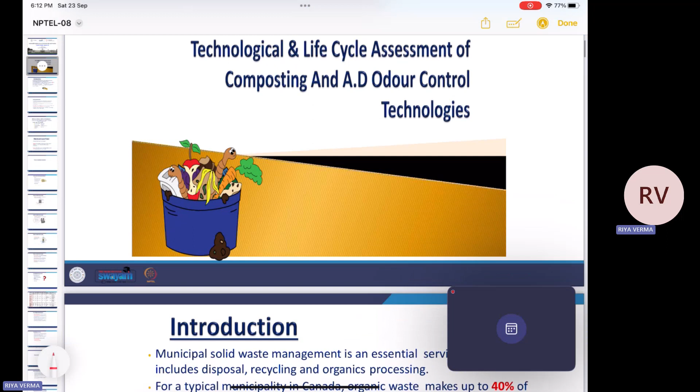So, first case study is the technological and life cycle assessment of composting and AD odor control technologies. So, basically, this study is done to understand the life cycle assessment of the composting process and the odor generation due to the decomposition of the waste.

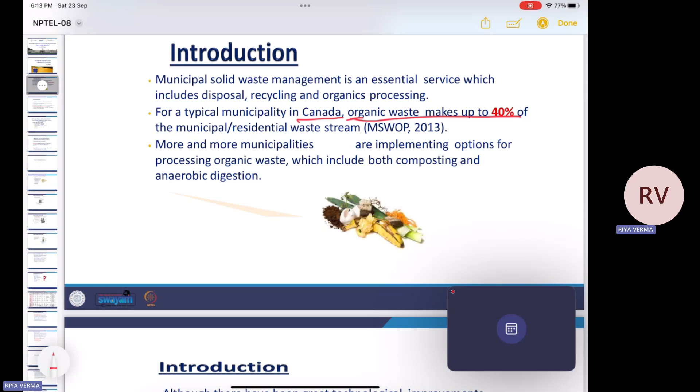So we all know that municipal solid waste management is an essential service which includes the disposal, recycling, and the organics processing. And for a typical municipality in Canada, the organic waste makes up to 40% of the residential waste stream. So this case study was done in Canada, and here, out of the total municipal solid waste, organic waste was 40%. So more and more municipalities are implementing options for processing the organic waste, which includes both composting and anaerobic digestion. So here, out of the total municipal solid waste, 40% was your organic waste.

And for the processing of this waste, we are going for two options. First process is the composting process, which includes the dumping or burying of this waste under the soil, and the second process is anaerobic digestion, which means decomposition of this waste in the absence of air.

Pooja, if you may confirm that am I audible to you guys? Hello.

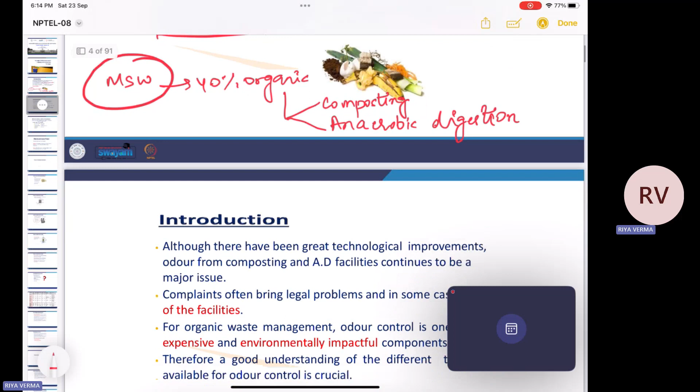Okay, so let's proceed further. So, although there have been great technological improvements, the odor from composting and anaerobic digestion facilities continues to be a major issue. We all know that during the process of composting, when the waste is getting decomposed, it generates a lot of odor problem, and that is why complaints often bring legal problems, and in some cases, closure of the facilities. So, for organic waste management, odor control is one of the most expensive and environmentally impactful components. So, therefore, a good understanding of the different technologies available for odor control is crucial.

So, why is this odor still a problem? Like, why aren't we able to solve this odor problem? Because this odor results from many different compounds that interact together in very complex ways. So, some of the common sources of odor include hydrogen sulfide. It has a very pungent smell. So, hydrogen sulfide, then we have organic sulfur, organic sulfides, ammonia, amines, fatty acids, aromatics, methyl ethyl ketone, and terpenes. So these are the agents that cause odor during the decomposition of the organic waste.

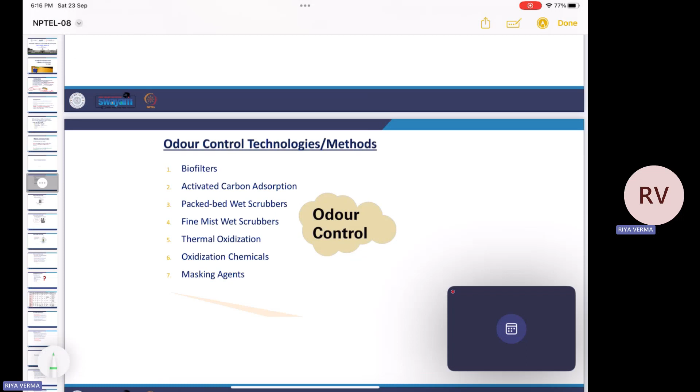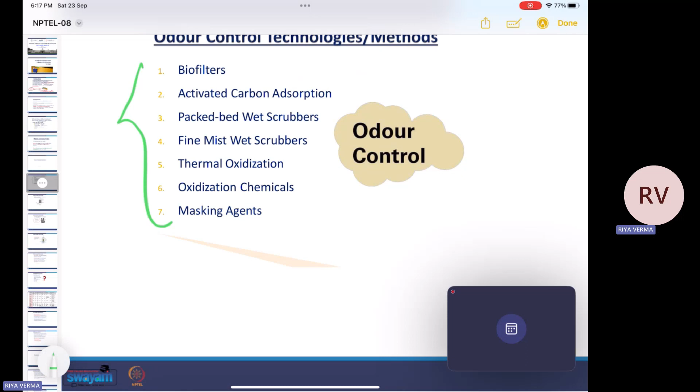So phase one was technological assessment of different odor control technologies or methods. These include your biofilter, activated carbon adsorption, packed bed wet scrubbers, fine mist wet scrubbers, thermal oxidation, oxidizing chemicals, and masking agents. So these are some of the odor control methods that we'll be comparing. And among all these methods, we'll try to find out the suitable method, and then we'll move towards phase two, the life cycle assessment of the selected odor control technologies based on the phase one results.

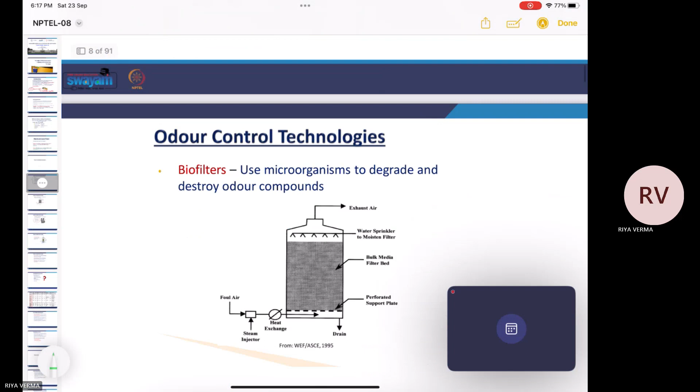So first one is biofilters. These filters use microorganisms to degrade and destroy the odor compounds. So here, see, this is your inlet where foul air is injected along with the steam, and then we have a heat exchanger, and then this air moves upward through this perforated support plate, and this is some kind of bulk media filter bed.

This is your filter bed. It has small spaces, so the air tries to move upward, and along with that the impurities present in the air get trapped in this filter bed, and this filter is moistened with the help of this spray, this water sprinkler.

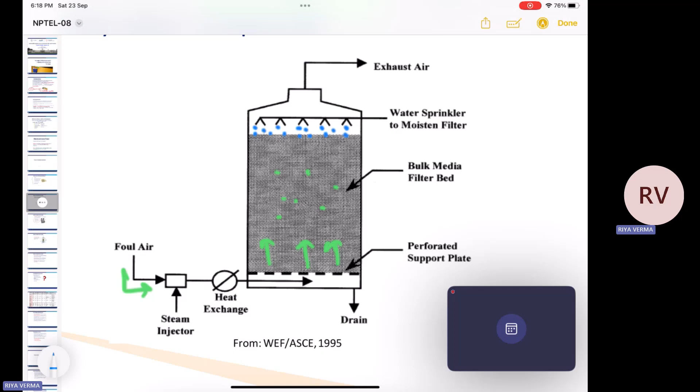This is your water sprinkler that moistens the filter, and this moist filter starts developing some microorganisms, and then these microorganisms try to degrade the odor compounds, and clean air is released from this exhaust. So this is your mechanism of biofilters.

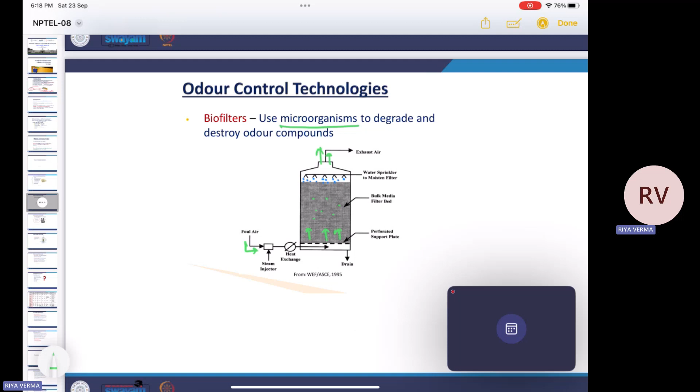Then we have activated carbon. We all know that activated carbon is a very good adsorbent. We use it in different processes. So the odorous compounds are removed by adsorption on activated carbon.

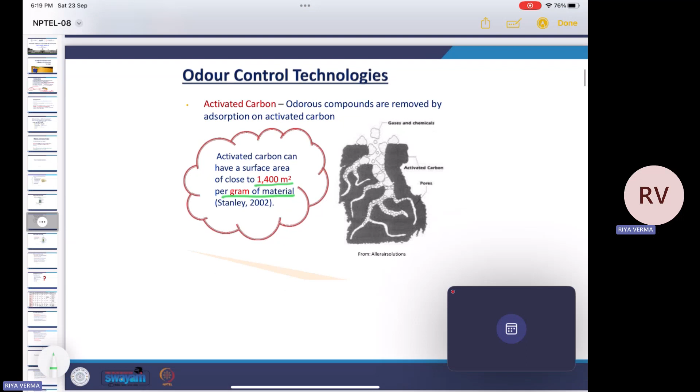It is a very good adsorbent because it has a very high surface area, close to 1400 square meters per gram of the material. So the gases and the chemicals get trapped inside the pores of this activated carbon, and that is how they are removed from the airstream.

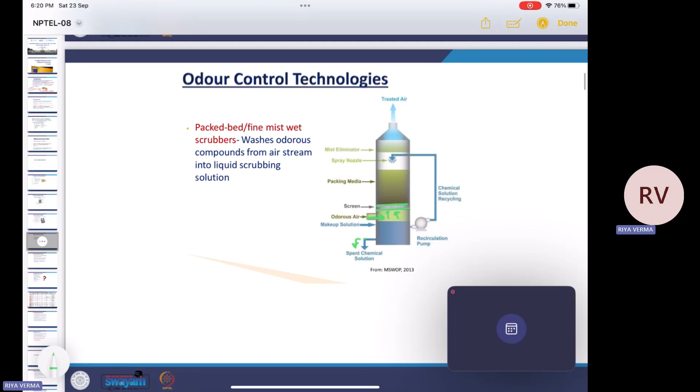that recirculates this makeup solution through this spray nozzle, and the spent chemical solution, which is the contaminated solution containing all the chemicals or the odor causing compounds, gets out of the system from these nozzles. So this is the mechanism of packed bed or fine mist wet scrubbers. This washes odorous compounds from the air stream into a liquid scrubbing solution.

Then we have thermal oxidizers, which destroy the odorous compounds in the air by heating it to a temperature between 1300 to 1600 degrees Fahrenheit. Some chemical oxidation can also be done. For example, chemicals like potassium permanganate, which is a very strong oxidizing agent. These chemicals react with odor causing compounds to form odor free compounds.

Then we have some masking agents. These are the chemical agents used to mask the odorous compounds, that is patented compounds or essential oils.

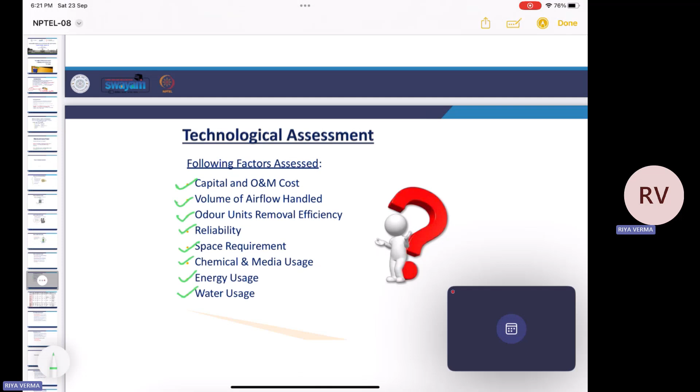For the technological assessment, the factors that we considered are the capital and operation and maintenance costs, volume of airflow handled, odor unit removal efficiency, the reliability of the process, the space requirement, the chemical and media usage, the energy usage, and the water usage. All these factors were assessed for the technological assessment of all these methods.

And this is a table that shows us the technological assessment of all these factors for biofilters, activated carbon, packed tower wet scrubbers, fine mist wet scrubbers, thermal oxidizers, oxidization chemicals, and masking agents. For example, for biofilters, the capital cost is moderate, but the odor unit removal can be more than 90%. So it has a very high efficiency.

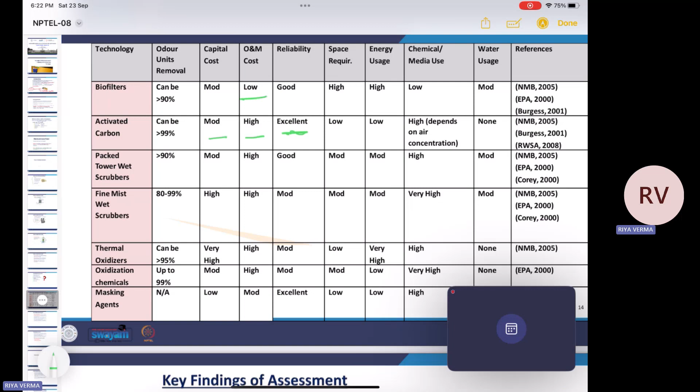For activated carbon the efficiency is more than 99%, so that is very high, and its reliability is also excellent. The capital cost is moderate, but its operation and maintenance cost is high, whereas for biofilters the operation and maintenance cost is low. So these are all the parameters used to compare all the methods.

And what are the key findings of the assessment? From a technological efficiency, usability, and cost perspective, biofilters are a preferred option. Packed bed wet scrubbers also function well in composting and AD facilities, that is anaerobic digestion facilities, especially for more concentrated air streams. Fine mist wet scrubbers are not a preferred choice due to higher capital and operating costs. So we compared these methods also from an economic point of view.

Carbon adsorption can be useful, but its applicability is limited to odor streams where ammonia is not produced. Then we have thermal oxidizers, which are not practical due to high cost, use of fossil fuels, and potential production of SOx and NOx. So we are trying to remove odor from the air stream, but on the other hand, we are releasing some air pollutants into the atmosphere.

So that is not the correct method, because on one hand we are removing the odor, but on the other hand we are creating some air pollutants as well. So this method is generally not preferred. Then oxidizing agents or masking agents can be used as part of an odor management plan, but are not effective as individual methods.

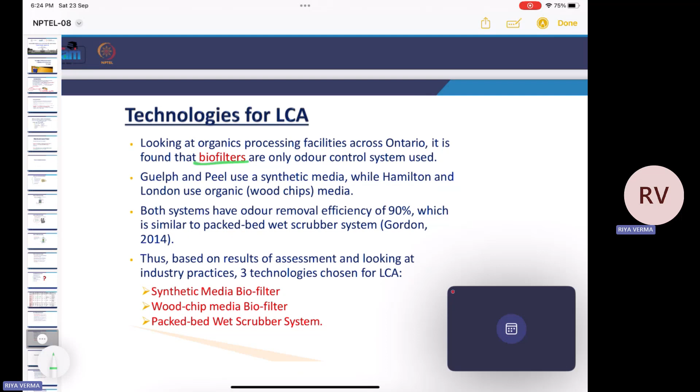Now coming towards the technologies for LCA. So looking at organics processing facilities across Ontario, it is found that biofilters are the only odor control system used. So generally we try to use biofilters, and these are the only odor control system that is used. Guelph and Peel use synthetic media, while Hamilton and London use organic wood chips media. Both systems have odor removal efficiency of 90%, which is similar to the packed bed wet scrubber system.

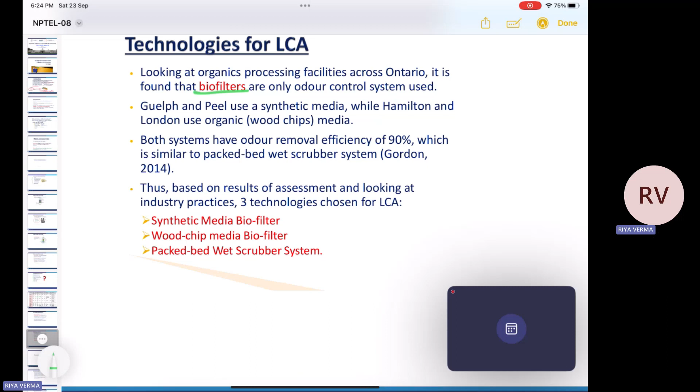Thus, based on results of assessment looking at industry practices, three technologies were chosen for LCA. First is synthetic media biofilter, then we have wood chip media biofilter, and then we have packed bed wet scrubber system. So these are the filter media. The synthetic media biofilter has filter media made up of synthetic materials, and for the wood chip media biofilter the filter media was made up of wooden chips.

So coming towards phase two, we have formulated these three filter systems. Now we'll be doing LCA of all these three methods, and we'll try to find out which is the most efficient way of removing the odor from the system.

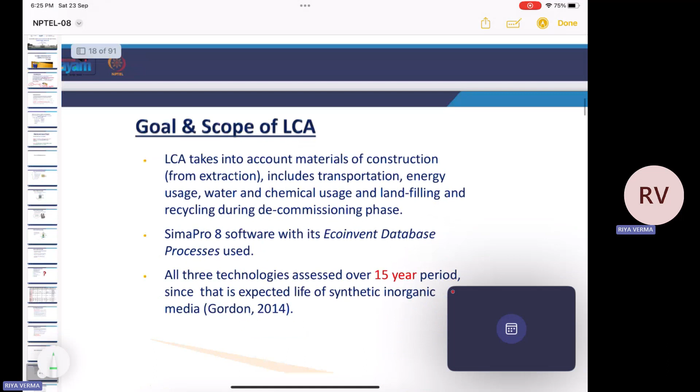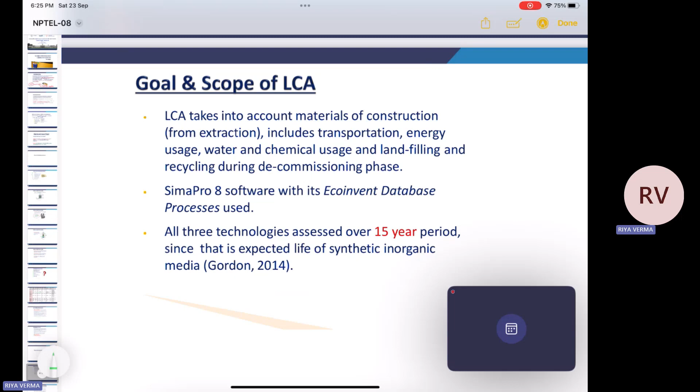So coming towards phase two of the life cycle assessment. Now we need to define the goal and scope of the LCA. So LCA takes into account materials of construction from extraction, including transportation, energy usage, water and chemical usage, and landfilling and recycling during the decommissioning phase. SimaPro 8 software was used with its Ecoinvent database processes, and all three technologies were assessed over a 15-year period since it is the expected life of synthetic inorganic media.

Now, what are the system boundaries and the functional units? So, the geographical boundary of analysis is considered to be the region of Ontario, and the facility in Guelph processes 30,000 tons per year of organic waste, whereas the facility in Hamilton processes 70,000 tons per year of organic waste. So, all the materials, chemical, water, and energy uses for all the systems are scaled to 1,000 tons per year,

and the boundary for each system only includes the odor removal system and does not consider pre-treatment or pre-scrubbing of air. Since all three systems have a comparable odor removal efficiency, the effect of treated air is not considered in this study.

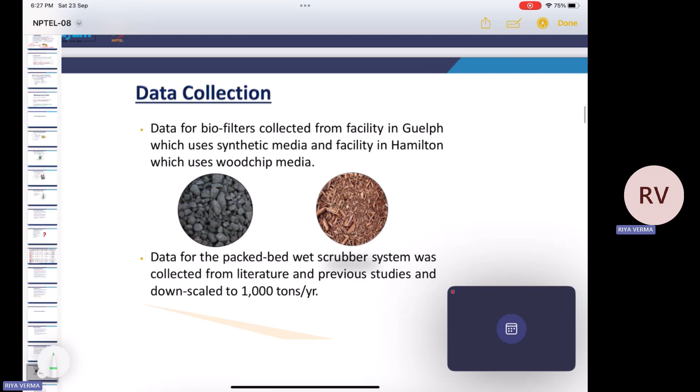Now, coming towards the data collection part, the first process in the life cycle assessment is the collection of data. So the data for biofilters was collected from the facility in Guelph, which uses synthetic media, and the facility in Hamilton, which uses wood chip media, and data for the packed bed wet scrubber system was collected from literature and previous studies and downscaled to 1,000 tons per year.

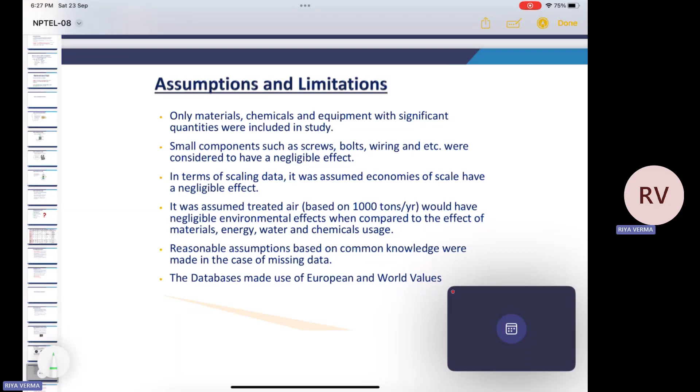Now, what are the assumptions and limitations of this study? So, only materials, chemicals, and equipment with significant quantities were included in the study. The small components such as screws, bolts, wiring, etc., were considered to have a negligible effect.

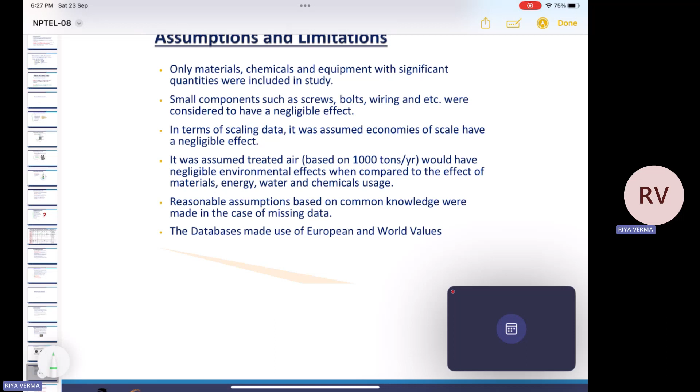In terms of scaling data, it was assumed economies of scale have a negligible effect, and it was assumed that the treated air based on 1,000 tons per year would have negligible environmental effects when compared to the effect of materials, energy, water, and chemical usage, and reasonable assumptions based on common knowledge were made in the case of missing data. The database made use of European and world values.

Now, what are the key data and the inventories? So, the biofilter systems were divided into five sub-assemblies: building frame, the filter media, then fan suction system, which sucks the air from the inlet. Then we have the water sprinkler system on the top of the filter media, then the control and monitoring system.

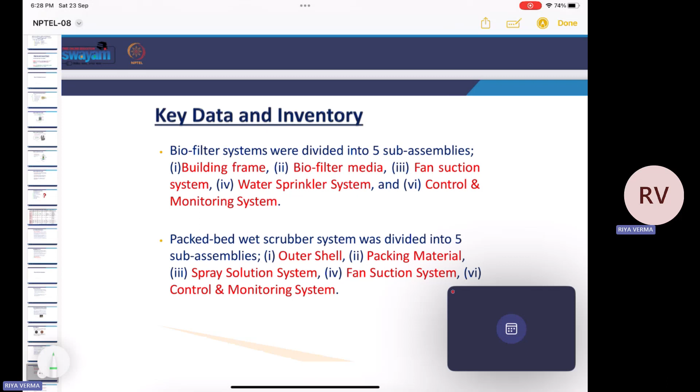Then the packed bed wet scrubber system was divided into five assemblies: first is the outer shell, then some packing material, then spray solution system and fan suction system, and last is the control and monitoring system. So key data and inventory. So this is the data for all the three processes.

The biofilter comprised three concrete cells, three suction fans, and 810 cubic meters of synthetic media. And this synthetic media was comprised of silica and alumina coated with a mixture of ferrite, organic carbon, alkaline buffer, and hydrophobic chemical. The biofilter at the Hamilton facility comprised one big concrete cell.

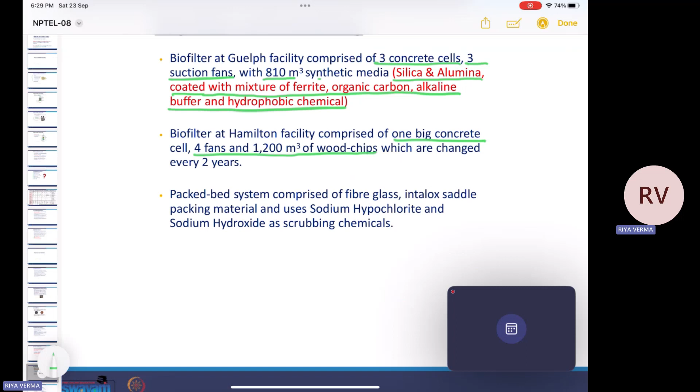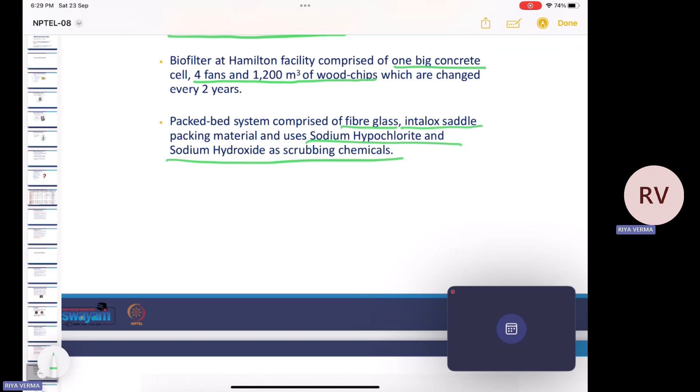First is the cumulative energy demand. Second is climate change. Third is human toxicity. Then photochemical oxidant formation. Then metal depletion. Then fossil depletion. Then we had terrestrial acidification. Then freshwater eutrophication. Then we had marine eutrophication and terrestrial ecotoxicity, freshwater ecotoxicity, and marine ecotoxicity.

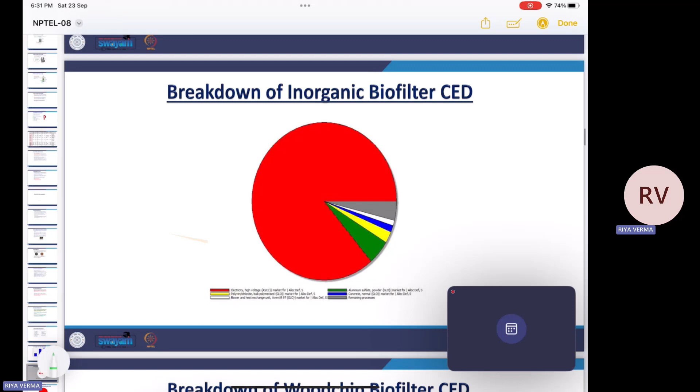Now coming towards the characterization and normalization. Characterization scales the result by percentage based on the highest impact, and normalization is done by dividing the impact category by the reference. A reference value can be found by looking at the average environmental load in a country or region over a year and dividing by the number of people.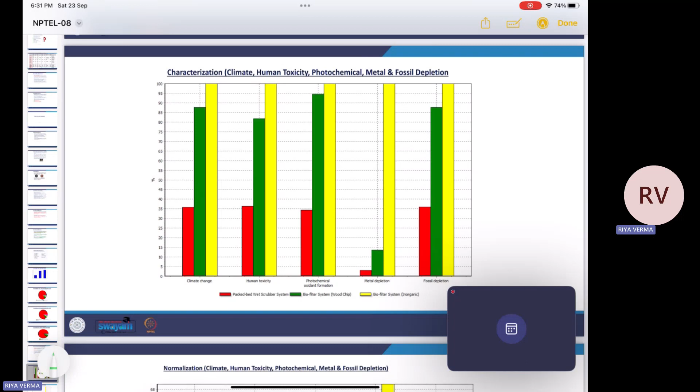So this is the characterization of climate change, human toxicity, photochemical oxidant formation, metal depletion, and fossil depletion in percentage. These values are all in percentage, and the maximum impact was given by the biofilter system for inorganic material, and the minimum impact was observed in the packed bed wet scrubber system.

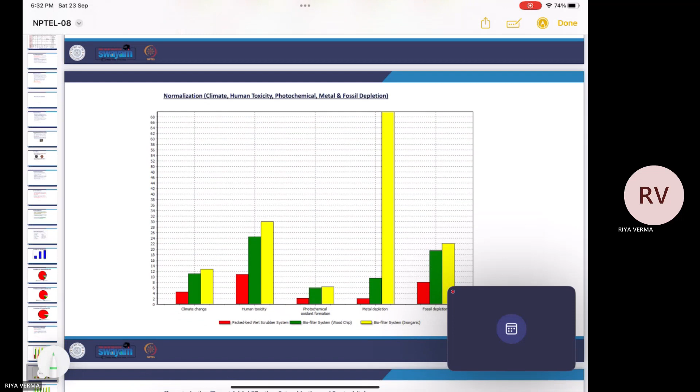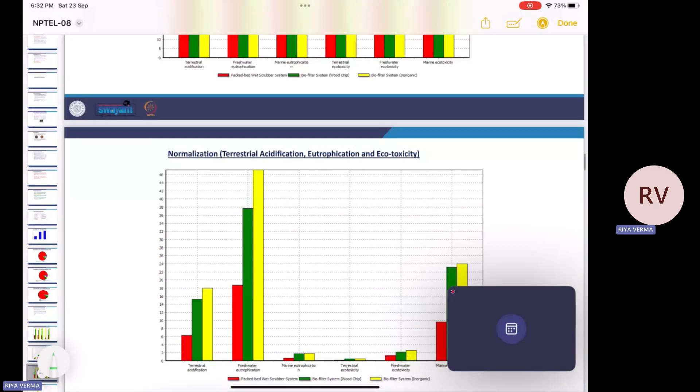Here normalization is done for climate, human toxicity, photochemical, metal and fossil depletion. Same is the characterization and normalization for other parameters. Now the impacts of concern. Based on the figures, the impacts of concern are metal depletion, fossil depletion, human toxicity, freshwater eutrophication, and marine ecotoxicity.

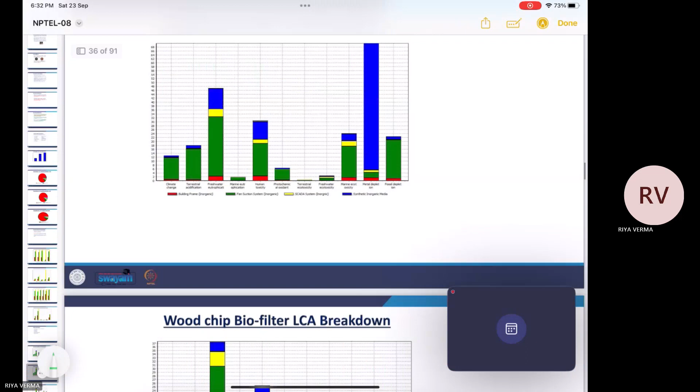And this is the synthetic biofilter LCA breakdown for all these impacts of concern. And these are all the breakdowns for all the impacts of concern. Now coming towards the key impacts, that is climate change. Although the climate change impact is low, it is considered because it is always of concern.

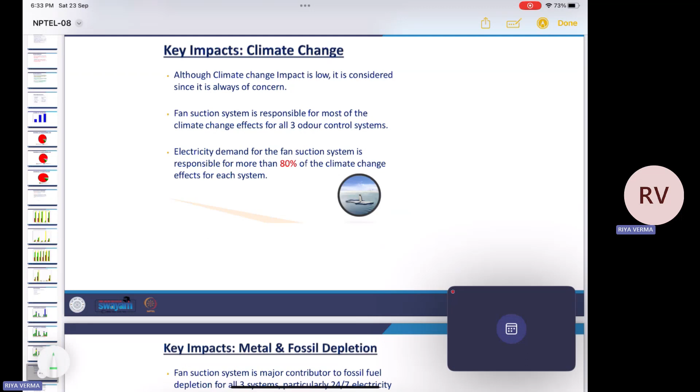The fan suction system is responsible for most of the climate change effects for all three odor control systems, and the electricity demand for the fan suction system is responsible for more than 80% of the climate change effects for each system.

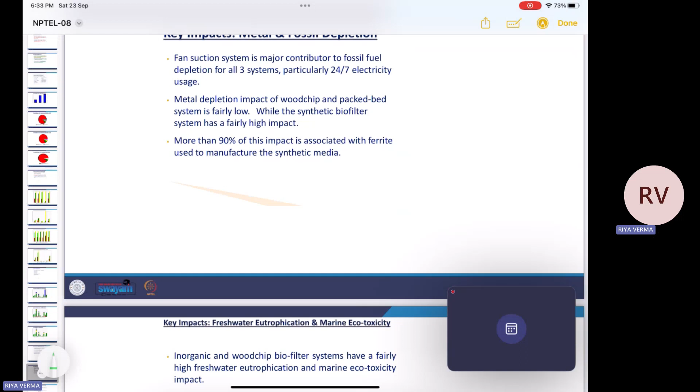Now coming towards the key impacts, that is metal and fossil depletion. The fan suction system is a major contributor to fossil fuel depletion for all three systems, particularly 24/7 electricity usage. The metal depletion impact of the wood chip and packed bed systems is fairly low, while the synthetic biofilter system has a fairly high impact. More than 90% of this impact is associated with ferrite used to manufacture the synthetic media.

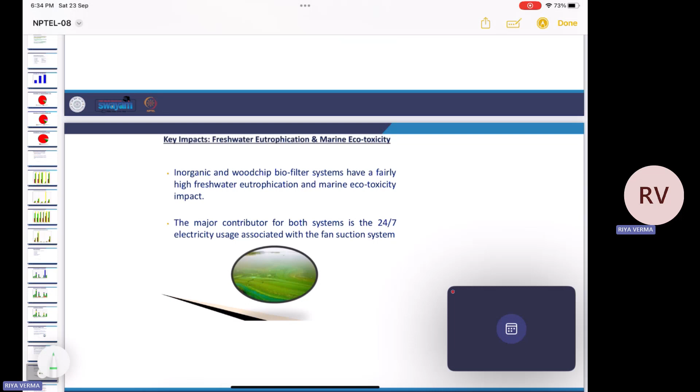Now, for freshwater eutrophication and marine ecotoxicity, the inorganic and wood chip biofilter systems have a fairly high freshwater eutrophication and marine ecotoxicity impact. And the major contributor for both systems is the 24/7 electricity usage associated with the fan suction system. So these are the key impacts for human toxicity.

So for all the impact categories, the inorganic media biofilter had the highest impact, followed by the wood chip biofilter system, and the packed bed system had the smallest impact for all the categories. So the synthetic media showed a higher impact level than the wood chip media, even though the synthetic media had a lifespan of 15 years and the wood chip media had to be replaced every 2 years.

So the major contributing factor for all the impact categories was the higher electricity usage that is associated with using a bigger fan suction system for the biofilters as compared to a smaller system used for the packed bed system. The biofilter systems have to draw odorous air through the larger surface area of material as compared to the packed bed wet system, which uses a single industrial fan.

The inorganic media in the biofilter was the primary cause of high metal depletion impact. The synthetic media is coated with a ferrite solution. Now coming towards the conclusion and the recommendations. Choosing a system based on operational parameters, the biofilter systems were the recommended choice. Looking at operation and maintenance and ease of operation, the inorganic system is the preferred choice over the wood chip system because the media does not have to be changed often.

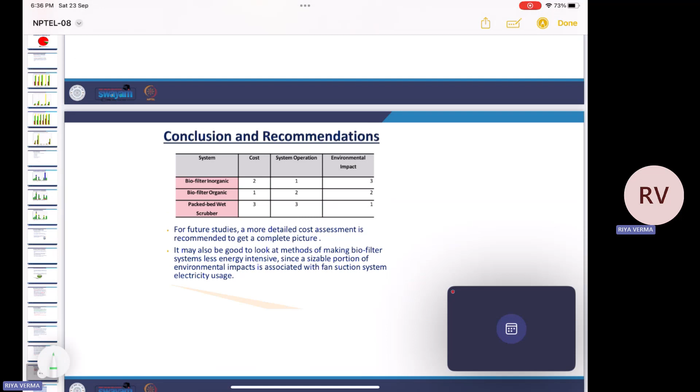In terms of the system with the lowest environmental impact, the clear choice is the packed bed system based on LCA. Thus, the choice of system depends on what criteria is of importance, that is, whether we are concerned about the cost or the environmental impact or the system operation. So this is the conclusion that we got for all the three factors that we needed to consider: the cost, system operation, and the environmental impact.

It is very clear that the inorganic biofilter is the most efficient in terms of system operation, and the packed bed wet scrubber is the least efficient. In terms of cost, the organic biofilter is the most efficient. And in terms of environmental impact, the packed bed wet scrubber was the most efficient.

Coming towards another case study, that is the kerosene lamp and the solar lamp. We need to compare which is more efficient, whether we should use a kerosene lamp or a solar lamp. So the goal is to compare a kerosene lamp to a solar powered lamp to determine a favorable solution. Describing the function and the functional unit, here the function is to provide adequate lighting for reading and writing. This is the function for both lamps. And here we have defined the functional unit as more than 100 lumens for 4 hours every day for 10 years.

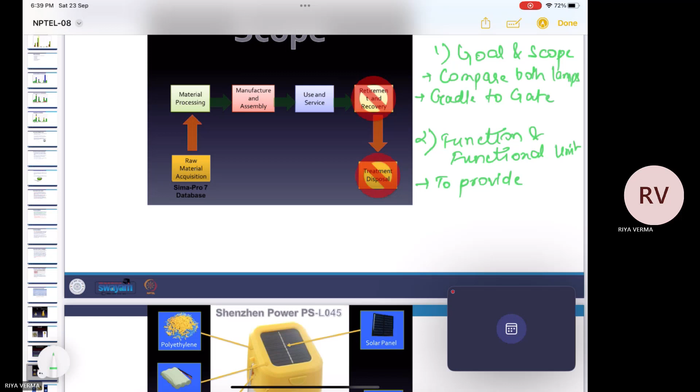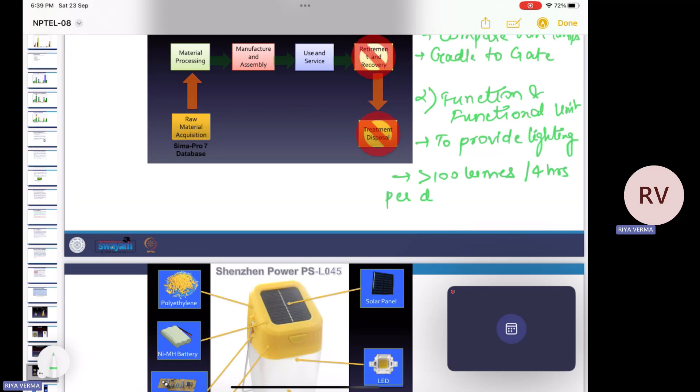And what is the scope of this study? The scope of this study is from cradle to gate: from raw material acquisition to material processing, then manufacture and assembly, and then use and service. We are not concerned about retirement and recovery or the treatment and disposal process. So this is your cradle to gate study. And the function is to provide light, right? And our functional unit is more than 100 lumens, 4 hours per day, for how long? 10 years.

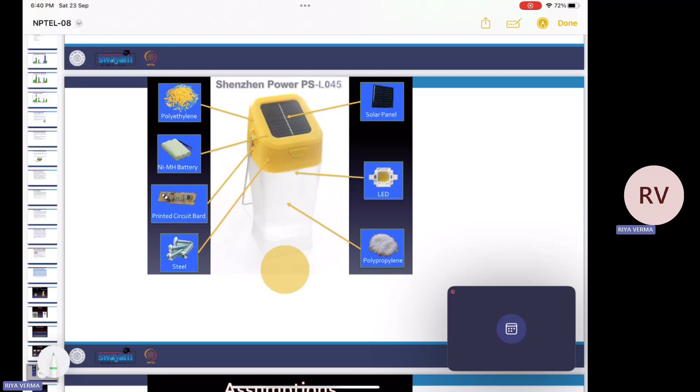So we have defined the goal and scope of the study, then the function and functional unit. Now, these are some of the components. First we'll start with the solar powered lamp. The outer casing is made of polyethylene. Then there is a nickel battery inside, and for the operation of this solar lamp we have a PCB, that is a printed circuit board. Then there are some steel screws and also a steel handle, which you can clearly see.

Then there is a solar panel installed on the top of this lamp. Then there is an LED light installed inside the lamp, which gives us the lighting. And the lower casing is made of polypropylene. Coming towards the assumptions, the usable life of this lamp is 10 years. It is assembled in Shenzhen, China, and it is distributed in Tanzania, Africa. So after assembly, it is transported to Africa and distributed and used there.

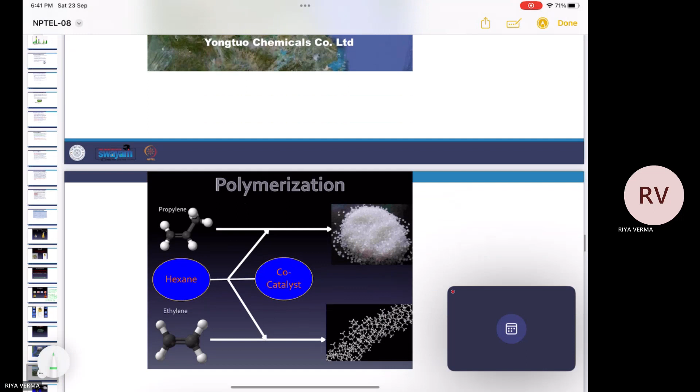So from where are we importing all the parts? The assembly is done in China, but the components are manufactured in different places. The polypropylene is imported from Mitsui Corporation Limited in Japan. The polyethylene is obtained from Yongtuo Chemicals Corporation Limited in China. Then this is the process of polymerization for the polypropylene and polyethylene. The PCB boards we get from Zhuhai Westpride Technology Limited in China, and the photovoltaic cell we get from Linhai, Xi'an, China.

The LED light that is installed inside this lamp is got from the Shenzhen Easter Battery Corporation. Sorry, the LED light is got from the Lightning Optoelectronic Technologies Corporation that is in Shenzhen, Guangdong, China. And the battery is also got from Shenzhen Easter Battery Corporation Limited. Both are in China only.

Now, this is the total traveling distance for each of the components of this lamp, which is assembled in Shenzhen in China. Like the polypropylene or the polyethylene travels for 1964 kilometers, then the solar panel travels for 1366 kilometers to reach. This is polyethylene, comes for 1964 kilometers, and polypropylene comes for 3834 kilometers, if I'm not wrong. Let me confirm. Yeah, polyethylene and polypropylene.

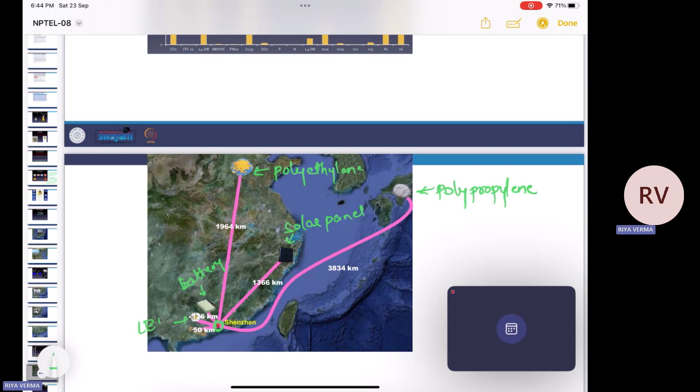Okay, so this is your polyethylene. This is your polypropylene. This is your solar panel, battery, LED, and this is your PCB.

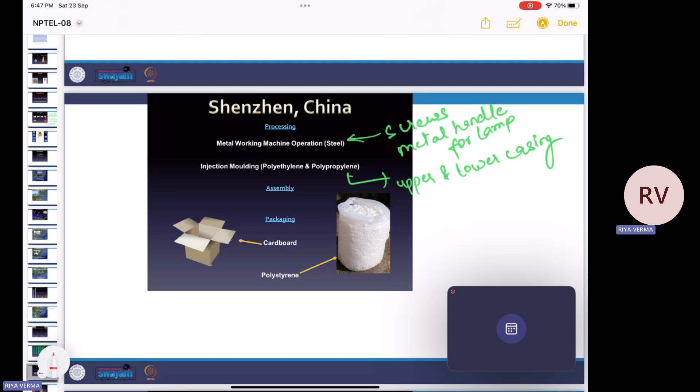Then we had the assembly of all these materials, and after the assembly the lamp goes for packaging. During packaging, we use two types of materials: the cardboard box inside which we place our finished product, and also polystyrene, the thermocol that we use for fixing the lamp inside the cardboard box, so that it doesn't get damaged during transportation.

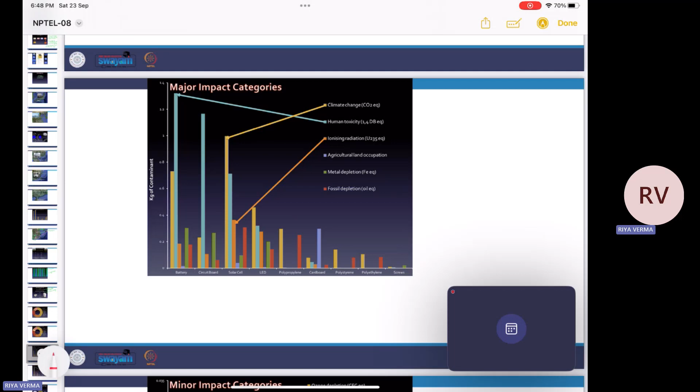These are the minor impact categories. So the major impact categories included climate change, that is CO2 equivalent, human toxicity, ionizing radiation, agricultural land occupation, metal depletion, and fossil depletion. And the minor impact categories include ozone depletion, photochemical oxidant formation, particulate matter formation, terrestrial acidification, freshwater eutrophication, marine eutrophication, terrestrial ecotoxicity, freshwater ecotoxicity, marine ecotoxicity, urban land occupation, natural land transformation, and water depletion. So these are all the major and minor impact categories.

Now coming towards the kerosene lamp. Some of the assumptions made for the kerosene lamp include a tin box which is used to form the kerosene lamp. So first we have a box which has a usable life of 2 years, it is 1 mm thick and it can be recycled. And it was formulated in Nairobi, Kenya. And then we had a cotton wick, that is 3/4 inches in diameter, and it also has a usable life of 2 years, and it is a processed product.

So for the given functional unit, we needed 10 grams of woven cotton wick, 5 grams of the tin container, having 5.5 liters capacity. And then kerosene is used as a fuel.

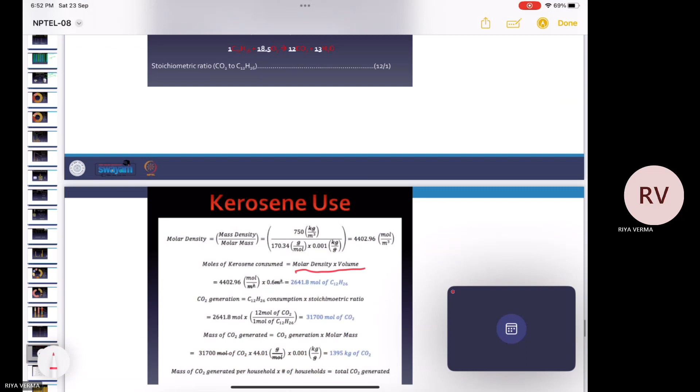So the molar density of kerosene comes out to be mass divided by molar mass. So it comes out to be 4402.96 moles per meter cube. Then moles of kerosene consumed will be equal to molar density into volume of kerosene used. The molar density is 4402.96 moles per meter cube, and the total volume of kerosene used is 0.6 meter cube, right? So we'll multiply this by 0.6 meter cube. We get 2641.8 moles of kerosene.

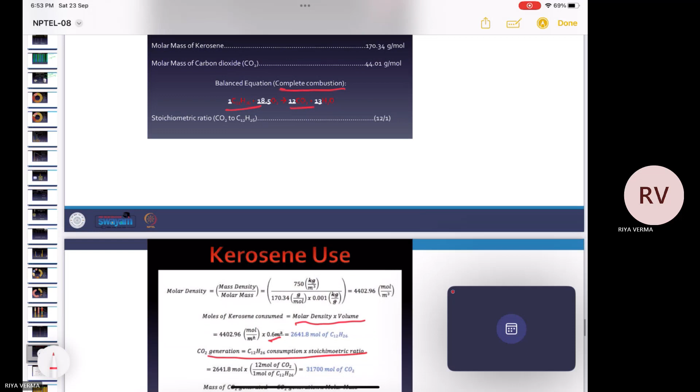So for CO2 generation, kerosene consumption into stoichiometric ratio, like conversion of this amount of kerosene into CO2, we multiplied this by the stoichiometric ratio. So 1 mole of kerosene is equal to 12 moles of CO2. Like we can see, for the combustion of kerosene, during the complete combustion, 1 mole of kerosene gives out 12 moles of CO2.

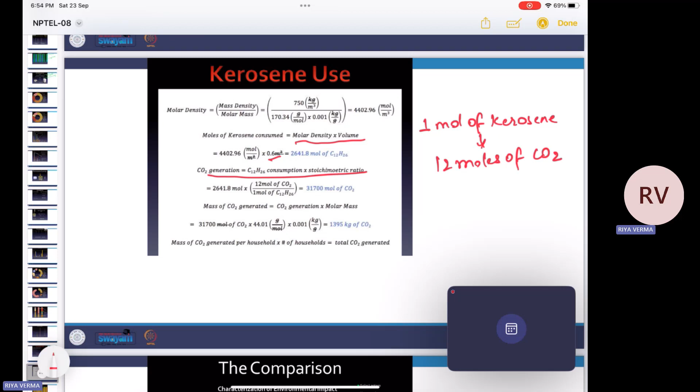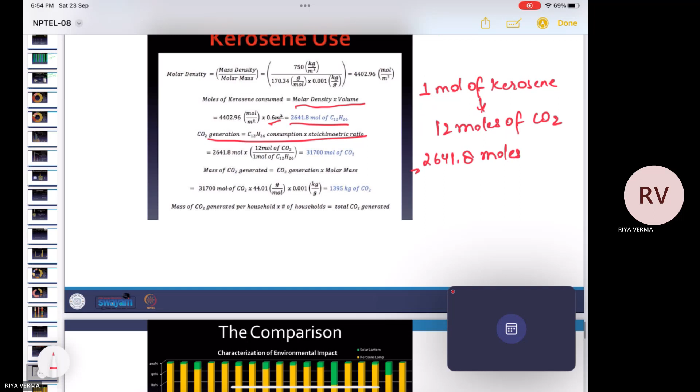So in total, for 2641.8 moles of kerosene, total CO2 generated will be 2641.8 multiplied by 12, right? So this comes out to be 31700 moles of CO2. Now, converting this CO2 into total mass of CO2 generated.

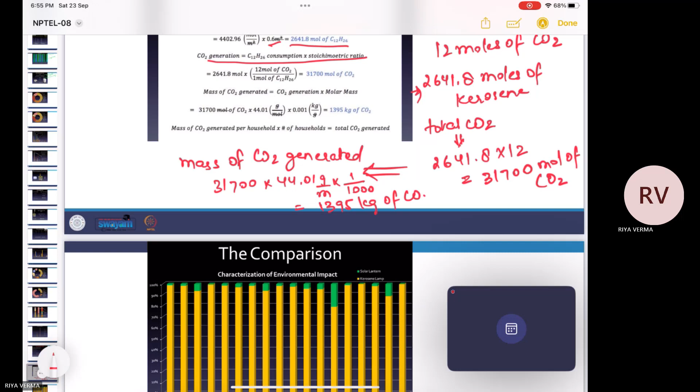So, mass of CO2 generated will be computed by multiplying this with the molar mass of CO2, that is 31700 moles of CO2 into 44.01 grams per mole. And converting this into kg, we divide it by 1000 to convert these grams into kg. So we get 1395 kg of CO2. So this is the mass of CO2 generated per household. And when we multiply this by the total number of households, we get the total amount of CO2 generated by burning of this kerosene.

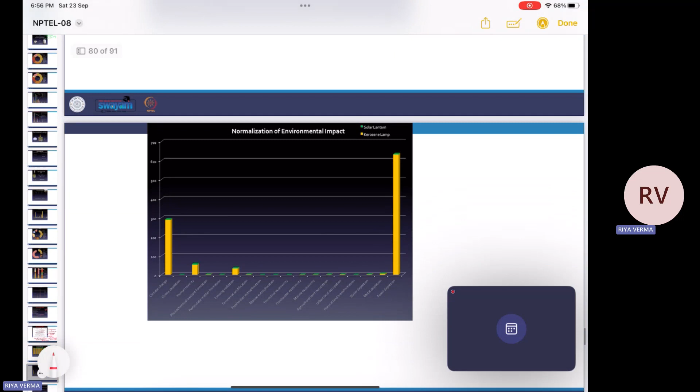So this is the comparison table, that is the characterization of the environmental impacts for the solar lantern as well as the kerosene lamp. And this is the normalization of the environmental impacts. So 600 million people already use kerosene lamps for lighting, and the CO2 produced from one Shenzhen Power PS solar lamp is equal to 3.315 kgs of CO2, while for the kerosene lamp functional unit, we get 1683.4 kgs of CO2. So the total difference in CO2 per functional unit is 1680 kg of CO2.

So for 600 million people, that is for 4 people per household, to calculate the kerosene per household, we got 252 million 12,750 tons of CO2.

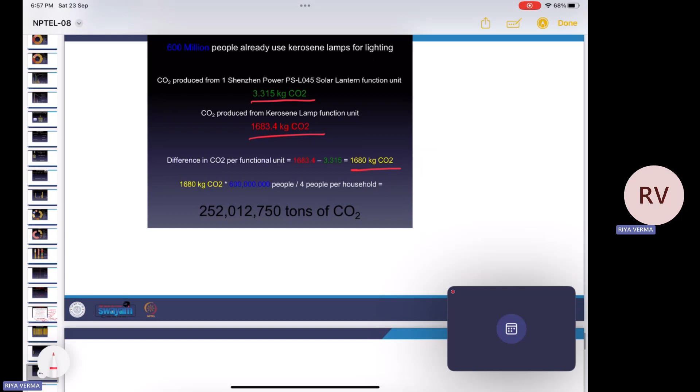That is the total amount of CO2 that was generated. That is the difference of CO2 from both the units that we were comparing. So it is clearly observed that using solar lighting is a better alternative to the kerosene lamp, because the kerosene lamp generates a large amount of CO2 during its combustion.

So with this, we come to the end of this module, and now we'll be having a quick discussion about last year's assignment questions. So I'll just quickly get into that. Just a second, quickly from that assignment. Okay. So we'll be having the assignment for week 8. Okay. So coming towards the first question,

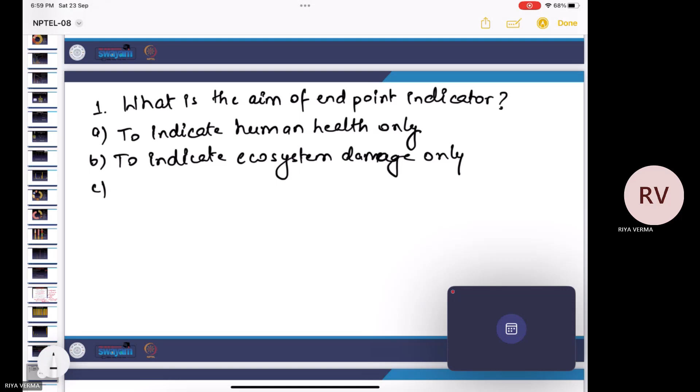the first question is: what is the aim of the endpoint indicator? Let me quickly write the options. To indicate human health damage, to indicate ecosystem damage, to indicate human health and ecosystem damage, and the last one is none of the above.

So during our life cycle impact assessment part, we had two types of indicators: one was the midpoint indicator and the other was the endpoint indicator. We discussed the aim of the endpoint indicators. The major aim of the endpoint indicator was to indicate the human health and the ecosystem damage. We were concerned about both the factors, right?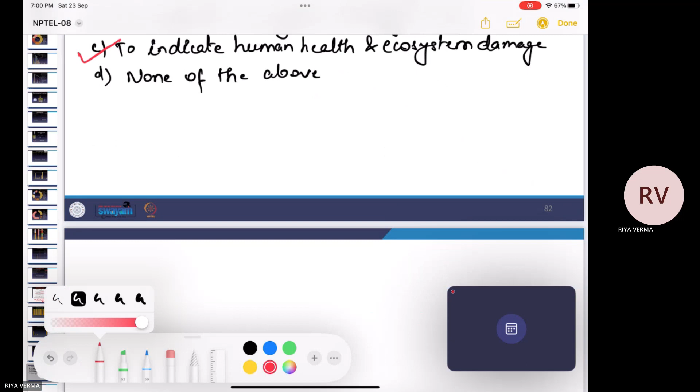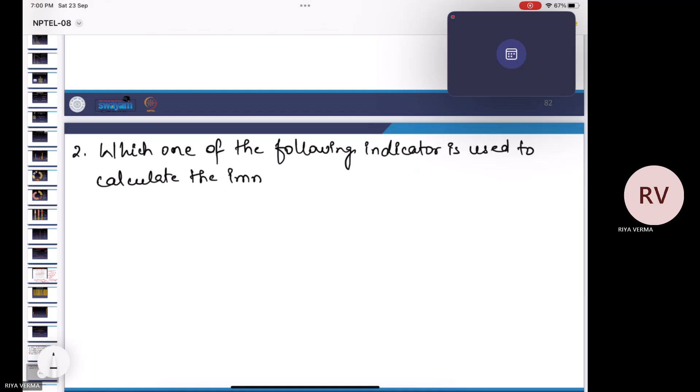Now, coming towards the second question: which one of the following indicators is used to calculate the immediate impact on the environment? Endpoint, midpoint, first point.

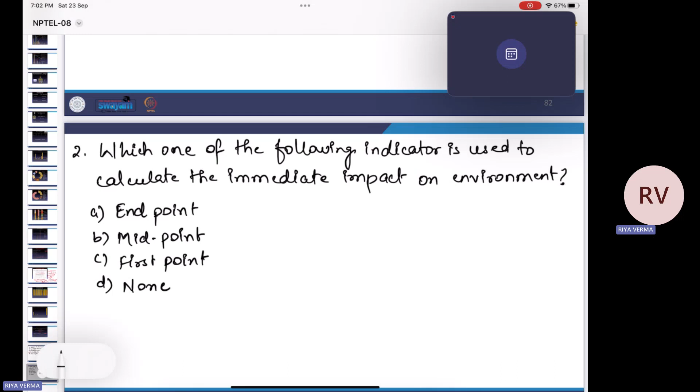Another thing related to the midpoint and endpoint indicators was the duration of the impact. To consider the immediate impacts caused by certain activities, we use the midpoint indicators, and to consider the long-term impacts, we use the endpoint indicators. So clearly, to understand the immediate impact on the environment, we find the midpoint indicators.

Now, coming towards the third question. Okay, so just a second. Okay, so

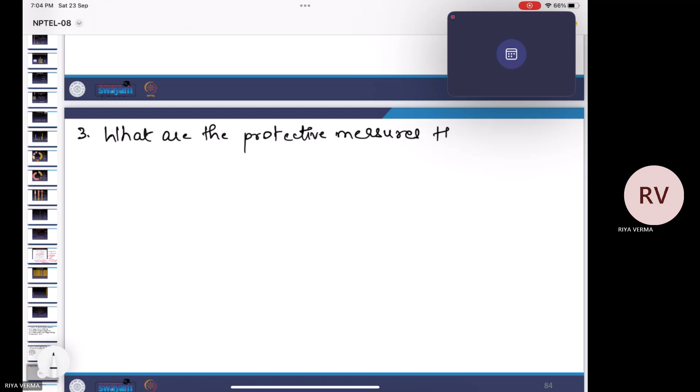the third question is: what are the protective measures that have already been taken to protect the ozone layer?

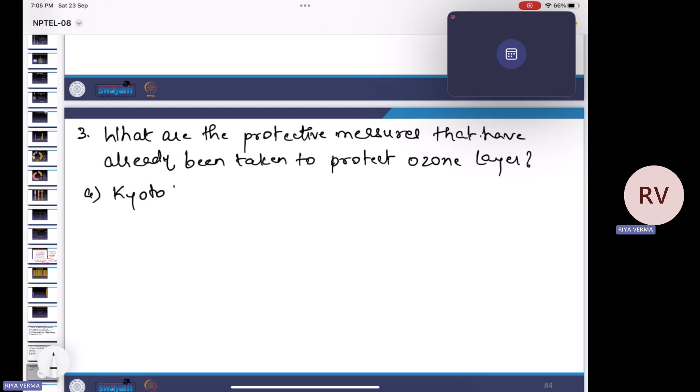So first is Kyoto Protocol, second is deindustrialization, third is CFC phased-out refrigerator, and fourth is regular monitoring of ozone concentration.

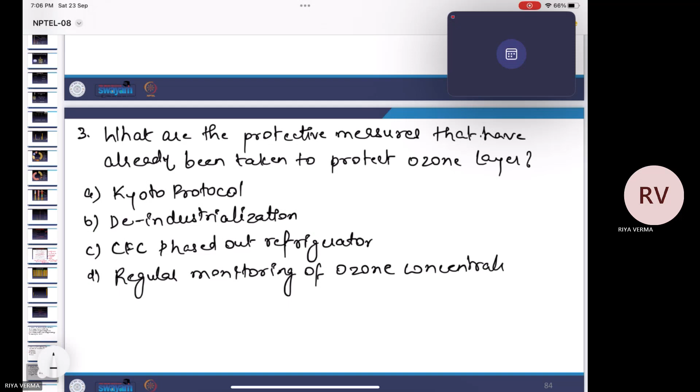So, among all these, what are the protective measures that have already been taken to protect the ozone layer? We know that the Kyoto Protocol was adopted to control the ozone emissions. And second is the CFC phase-out refrigerator, formulated to protect the ozone layer and to reduce the emissions of CFCs.

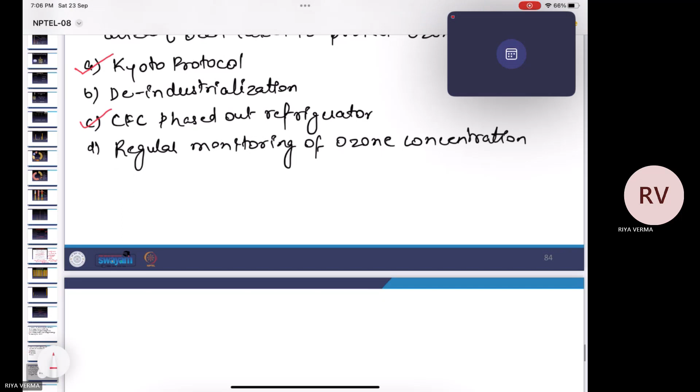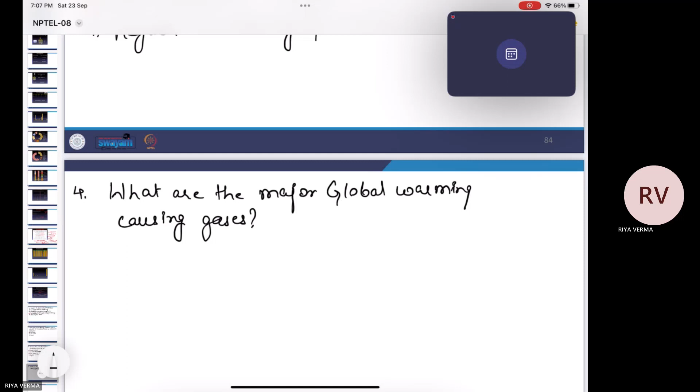Now, fourth question: what are the major global warming causing gases? Methane, ozone, sulfur dioxide, and D is carbon dioxide. So, among these, the major global warming causing gases are methane and carbon dioxide.

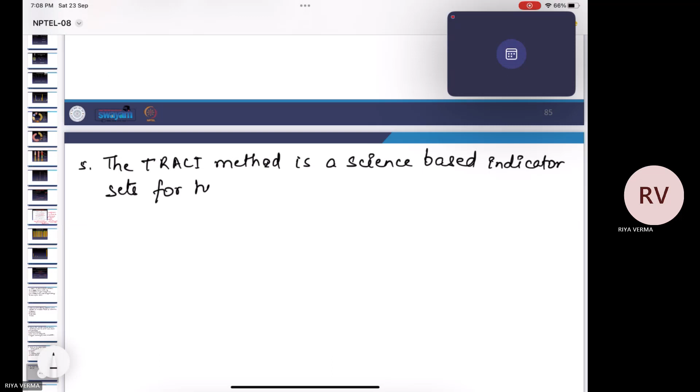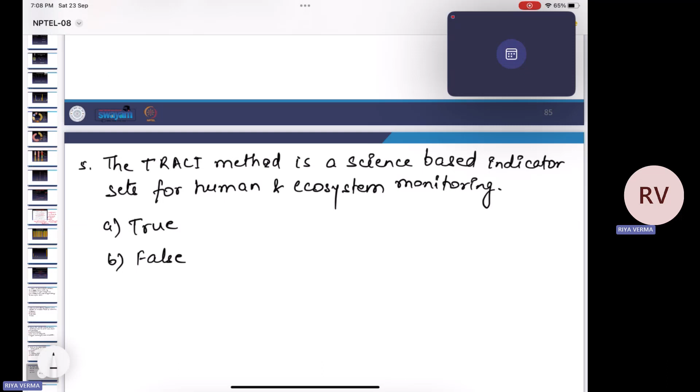Coming towards the fifth question: the TRACI method is a science-based indicator set for human and ecosystem monitoring. True or false? The TRACI method is a science-based indicator set for human and ecosystem monitoring, so this statement is true.

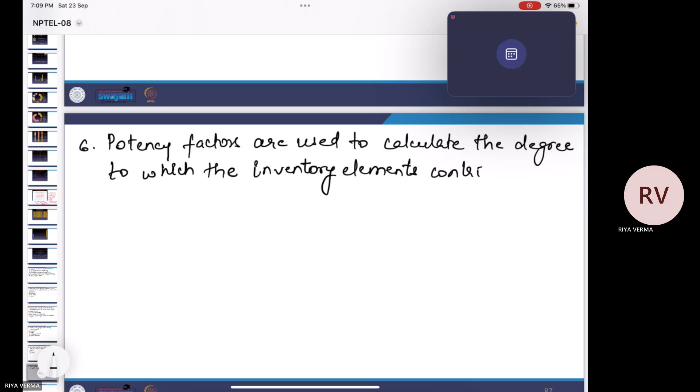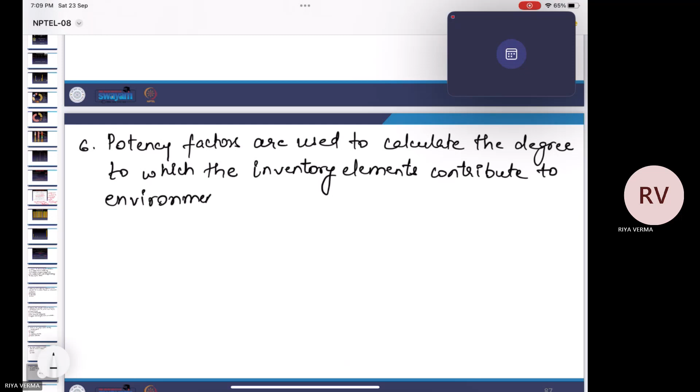Coming towards the next statement: potency factors are used to calculate the degree to which the inventory elements contribute to environmental impacts. So the potency factors are used to calculate the degree to which the inventory elements contribute to environmental impacts. So this statement is true.

Coming towards the seventh question: packed bed reactor uses microorganisms to degrade and destroy odor-causing compounds.

So, which reactor uses microorganisms to degrade and destroy odor-causing compounds? We discussed this in the first case study. Biofilters incorporated the use of microorganisms to destroy the odor-causing compounds. So instead of packed bed reactor, the correct answer is biofilters. So this statement is false.

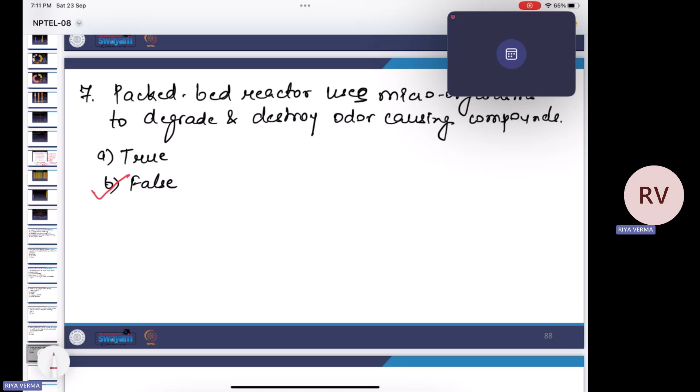Apart from these 7 questions, I have 3 numerical questions, which I'll incorporate after this class, because somehow I missed those questions and don't have them right now. I'll write those questions along with their solutions. And with this, we come to the end of this module as well as this course.